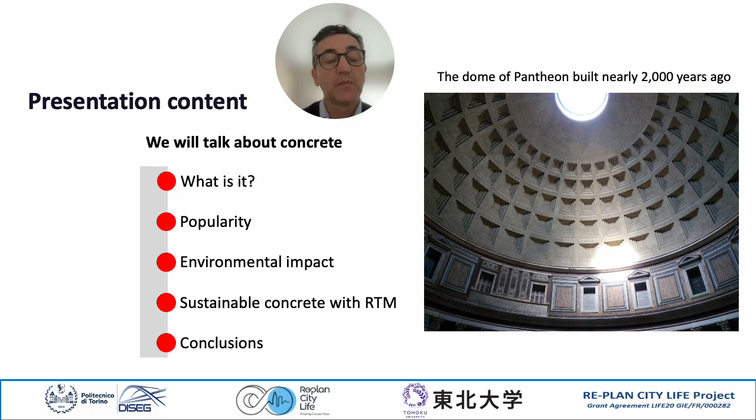So it is important to know what the concrete is, how popular is concrete, and of course also the environmental impact produced by the production of concrete. Then we talk about the possible sustainable approach to have a more environmentally friendly concrete with recycled tyre materials, and then we will draw some conclusions.

So let me explain the concrete using a simple analogy, a cake. Just like baking a cake, concrete construction needs a good recipe. The final result, quality of concrete or the taste of the cake, depends on several things. For example, the quality and quantity of ingredients, careful mixing, and appropriate curing or cooking.

So the recipe for concrete is just as important as the recipe for the cake. Uneven mixing or improper baking or curing can spoil both the cake and concrete. Both cake and concrete need a good recipe and careful attention at every step.

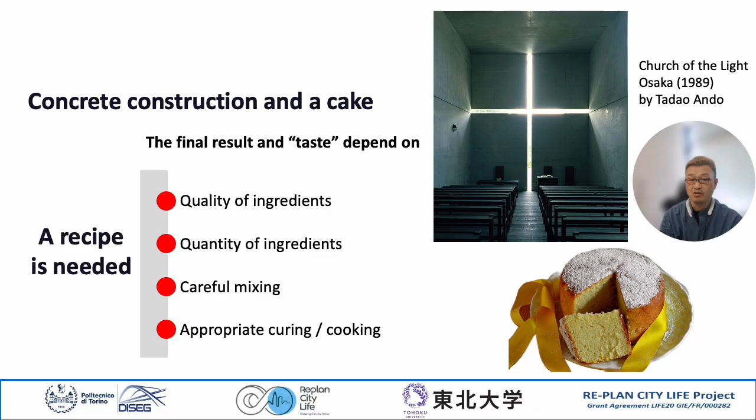So let's think about what we need to make cake. Here are the ingredients for a simple Molly cake. We use milk, flour, sugar, eggs, and baking powder in the right amounts. Each ingredient plays an important role in making cake soft and tasty.

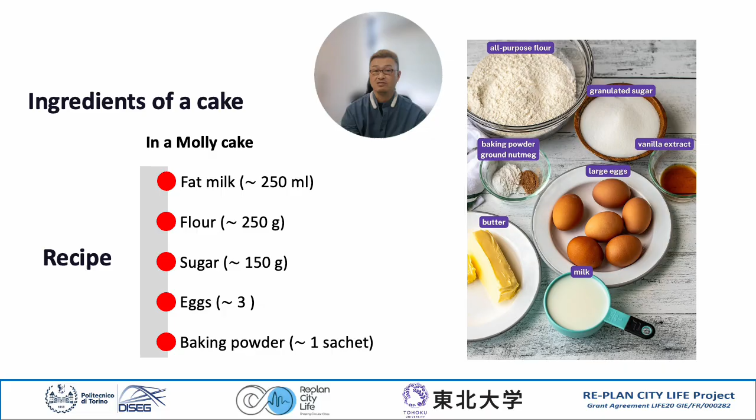Now, this is a recipe for concrete. In 1 cubic meter of concrete, we have cement, water, aggregate, and a small amount of admixtures in the proper amount. Aggregates make up the skeleton of the concrete, and cement, together with water, acts as glue that holds everything together.

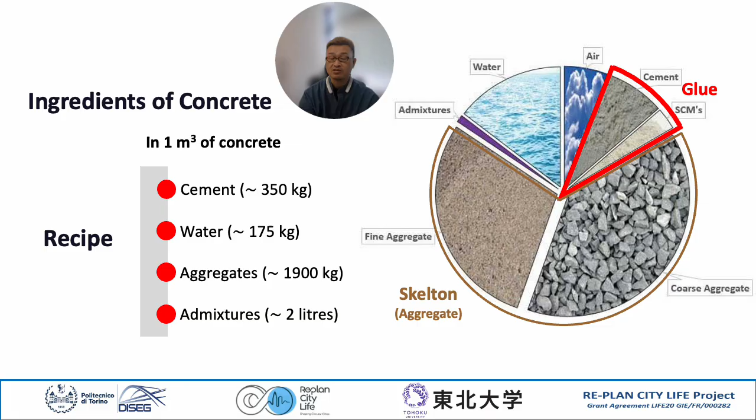Then we have to transport the mixed material from the mixing zone to another zone. In particular, in the case of a cake, we have to transport the mixed material into an oven. In the case of concrete, we have to transport the mixed concrete to the place where we are casting the construction and curing it.

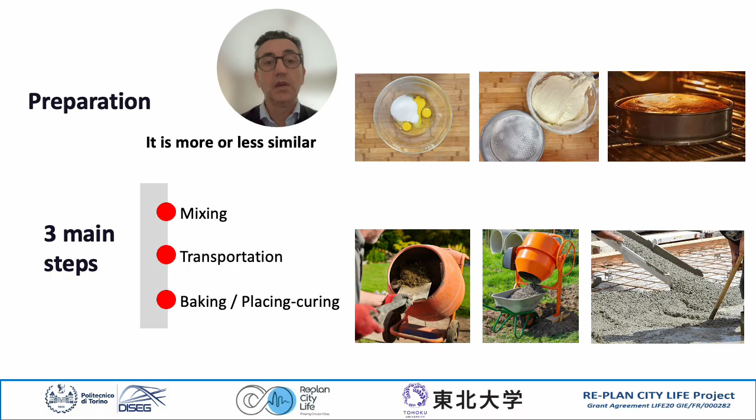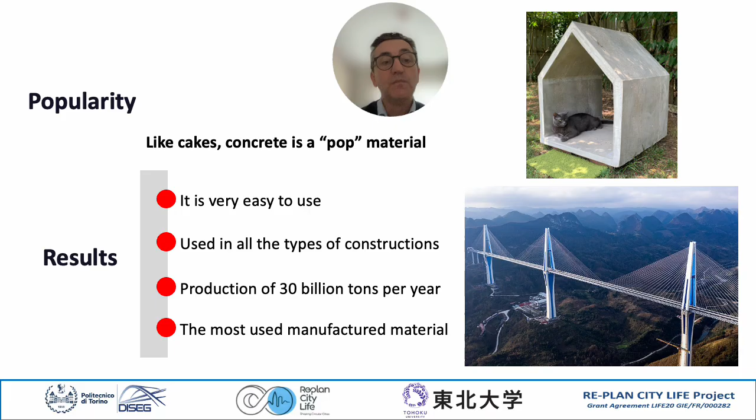As a result, concrete is a very popular material, like cakes, because it is very easy to use and it can be used for all types of constructions, from a small house for a dog or cats to very large infrastructures. We can estimate the production of concrete at 30 billion tons per year, which is the most used manufactured material in the world after water.

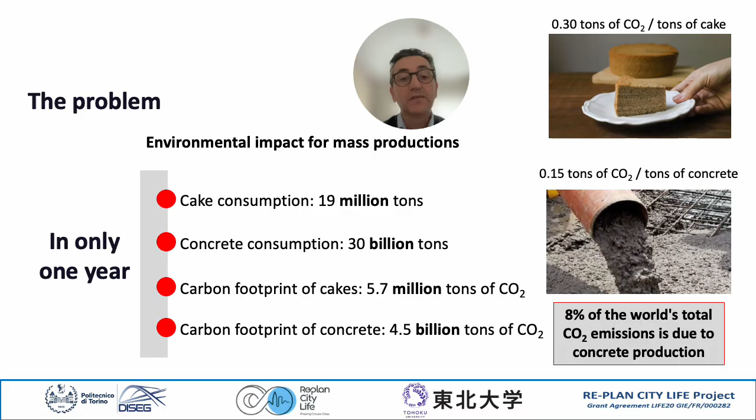But in only 1 year, we produce 30 billion tons of concrete and only 19 million tons of cakes. For this reason, the carbon footprint of concrete is 1,000 times greater than that of the cakes. As a result, 8% of the world's total CO2 emission is due to concrete production.

So now let's talk about the super strong concrete. By changing the recipe, the quality and quantity of the raw materials, we can create concrete with a much higher strength. UHPC, or ultra high performance concrete, can reach more than 150 MPa, about 5 times stronger than normal concrete. Of course, this type of concrete uses much more cement, so the CO2 emission per unit volume is much higher.

On the other hand, since the stronger concrete allows us to use a smaller amount of materials, the total CO2 emission can actually be reduced. So better strength means not only stronger structures, but also more sustainable solutions.

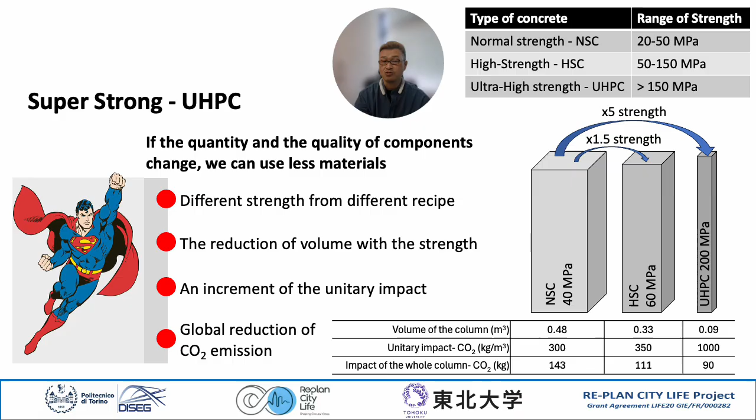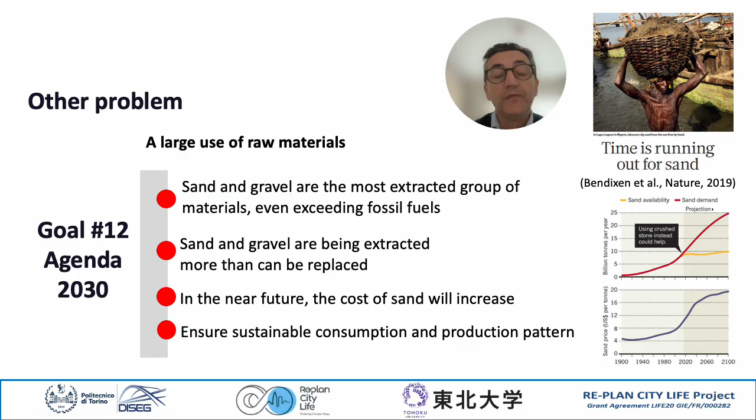Therefore, according to the Agenda 2030, and in particular goal number 12 of this agenda, we have to ensure sustainable consumption and production patterns of the concrete aggregates. To reduce the use of raw materials, we can use recycled materials. In the specific case of concrete, we need to change the recipe by substituting sand and aggregates in general with other materials, such as the rubber from end-of-life tires.

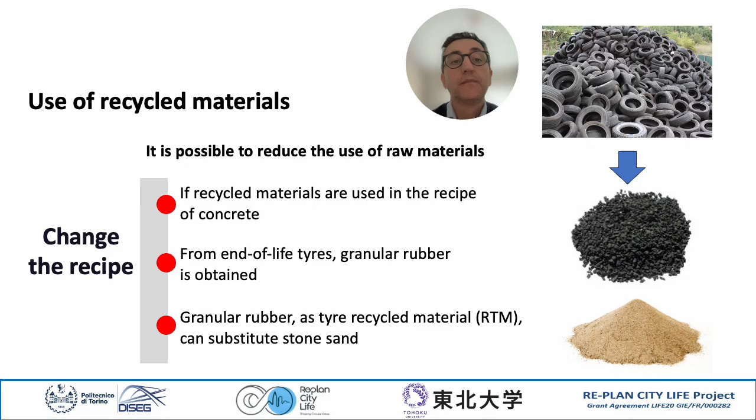Here we have an example of 2 different recipes. In particular, in recipe number 1, we have the traditional concrete made with cement, water, and sand. In recipe number 2, cement and water are the same, but sand is partially substituted with the rubber from end-of-life tires.

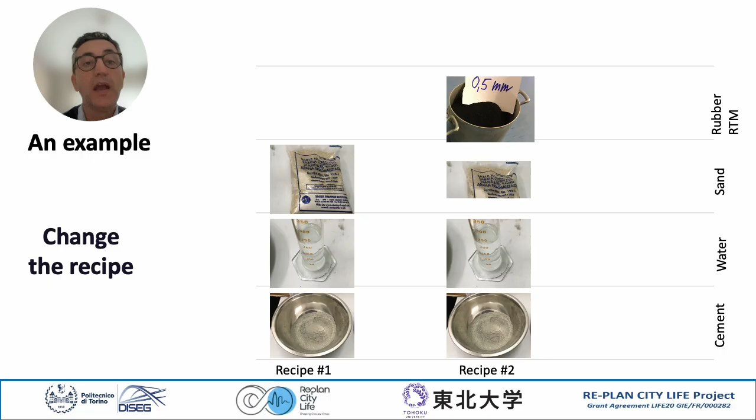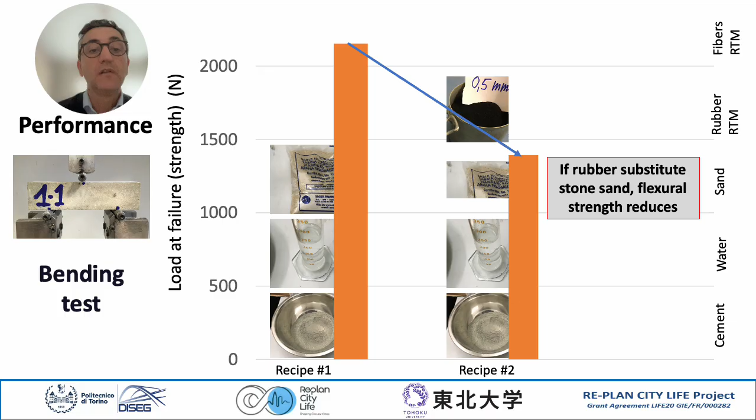If we analyze the performances of the concretes made with recipe number 1 and recipe number 2, we observe that in the second case, the final result provides a concrete weaker than the concrete obtained with recipe number 1. In the specific case of the bending test, we observe that if rubber substitutes some stone sand, the flexural strength of concrete reduces.

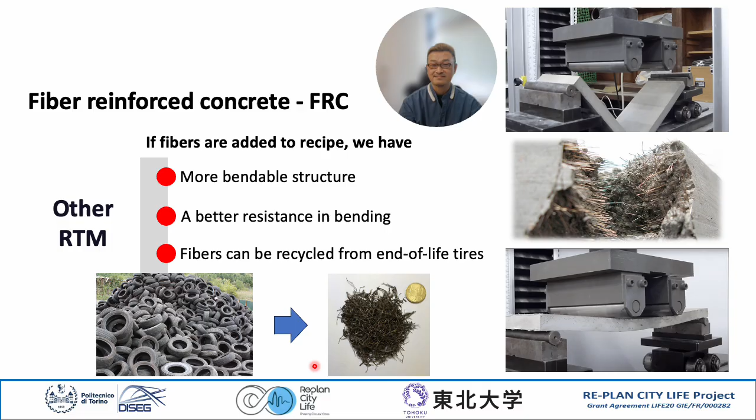By adding a sufficient amount of steel fiber, as shown in the middle photo, we can achieve this strong and flexible performance. This fiber can be recycled from end-of-life tires, making FRC not only stronger, but also more sustainable. We can introduce also a new recipe number 3, which is a fiber reinforced concrete. In addition to cement, water, sand, rubber from end-of-life tires, we have also steel fibers from end-of-life tires.

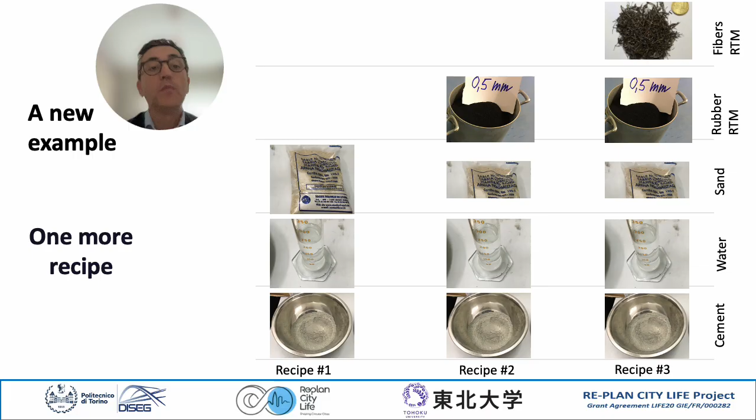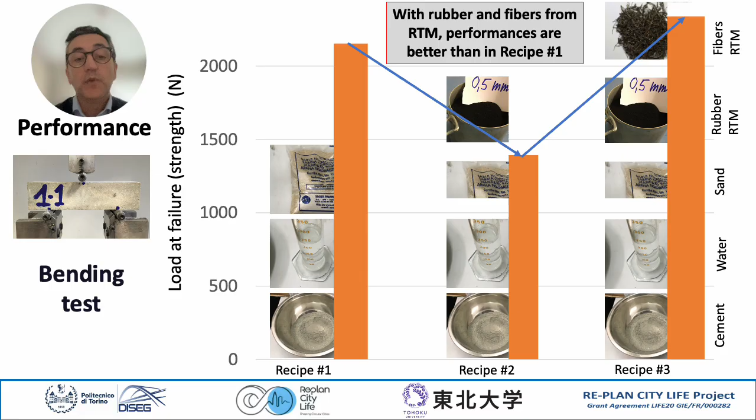If we test in bending the concrete obtained with recipe number 3, we observe that the strength is the highest, or better, is higher than the concrete obtained with recipe number 1 and recipe number 2. So, with rubber and fibers from recycled tire materials, the performances are the best that we can have, and they are better than the performances that we can obtain with concrete from recipe number 1. In other words, if the recycled tire materials are properly used, the final concrete is even better than the concrete of recipe number 1, in which we use only natural materials.

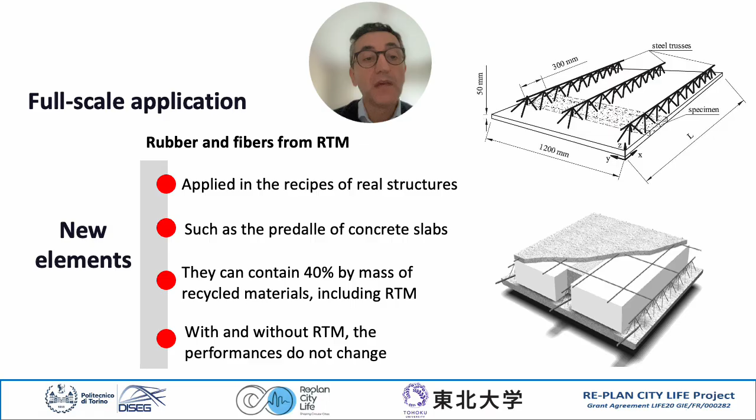In conclusion, we have concrete in our life and we can see it everywhere. It is the most used manufactured material, and unfortunately it has also a large impact. To reduce this impact, recycled tire materials can be used. By using the rubber, the steel fibers, and also textile fibers from end-of-life tires, we can reduce the natural resources needed to cast concrete.

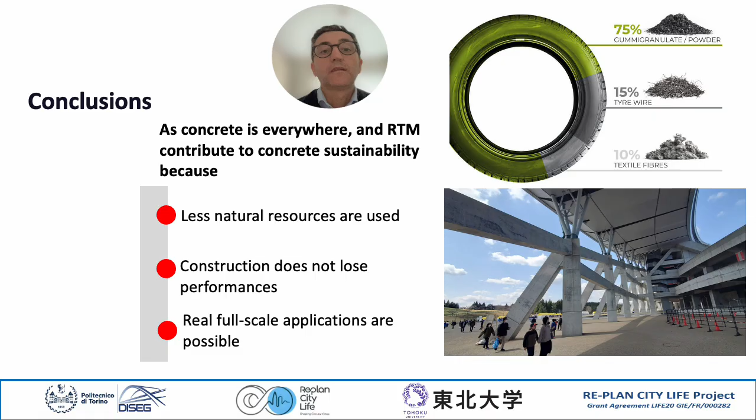However, in this substitution, if the materials are properly used, we can obtain the same results that we have in the concrete made with only natural materials, and real full-scale applications of the recipes of concrete with recycled materials are possible. Thank you very much for your attention.